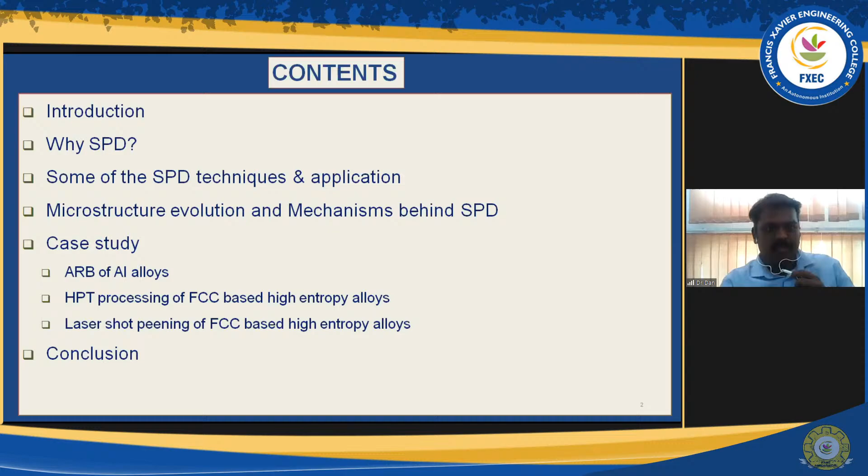Okay, so I will start with what's plastic deformation. Maybe all of you know about it, right? Plastic deformation means it's a permanent distortion. It might happen due to when you are applying external load to your material. Suppose, for example, here I took the tensile test.

Now I will talk a little bit about the atomistic mechanism behind this plastic deformation. To understand this process, you must know about physical metallurgy. You may know about dislocation and what is the defects in the crystals. Those things maybe you can understand. I will try to explain in a simple form.

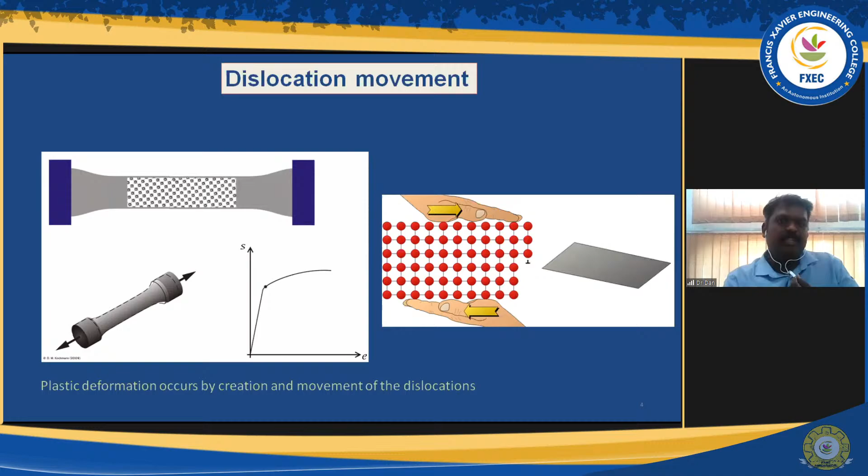Similarly, there are some other mechanisms like cross slip and climb process. By using that, deformation will happen. So this is the basic fundamental phenomena behind severe plastic deformation.

Now coming to severe plastic deformation - what is the meaning of it? Severe plastic deformation is nothing but a metal working technique. We apply very large strain on the metal or material, so that inside the material undergoes grain refinement. Suppose if you start with coarse grain, after the SPD process you will end up with ultra-fine grains or nanocrystalline structure.

Now you may ask in your mind, what's the difference with conventional processes like rolling or extrusion - they can also deform the material. So what is the difference in this SPD process? You may think about it.

The answer is: suppose if I'm doing a rolling process, with every pass the sample thickness will reduce, so the cross-sectional area reduces per pass. After a certain level you can't roll anymore - only up to a certain strain can be given to the material. But in the case of SPD, there is basically no significant change in the shape of the metal or material.

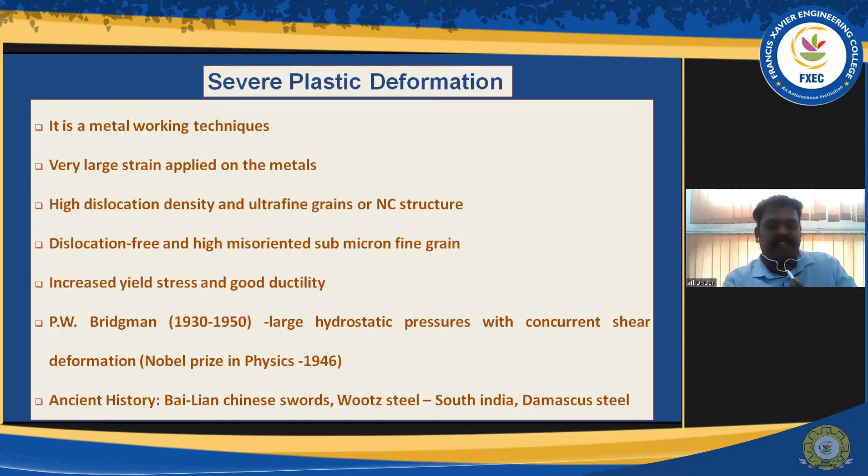So SPD is nothing but the grain refinement process. We are trying to make the material nanocrystalline, right? So there are always two approaches in the nanocrystalline approach: top down approach and bottom up approach.

In the top down approach, they refine the coarse grain into nanocrystalline. But in the case of bottom up, they do consolidation of the powder, then make it into nanocrystalline. This is the kind of powder metallurgy. I'm not going to discuss the bottom up approach today. SPD is the top down approach, and today we are going to discuss this process.

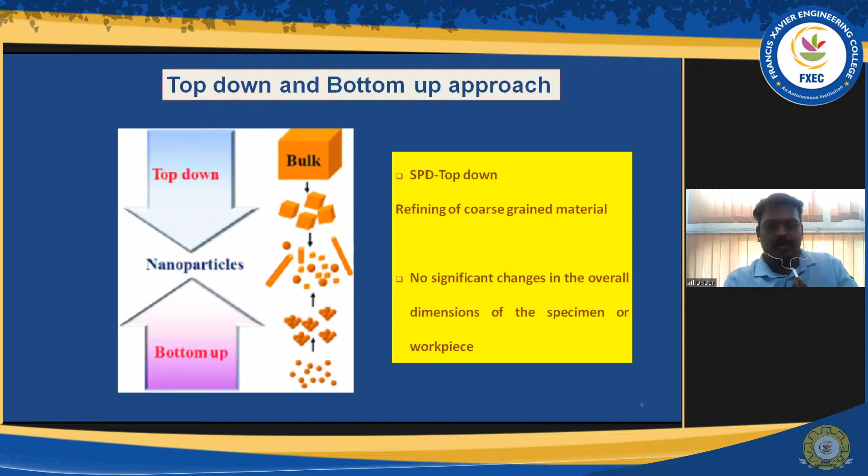Let me talk a little about grain refinement and nanocrystalline, since maybe some people don't know what is grain, what is nanocrystalline, what is ultra fine grain size. For that, I'll show this slide. Suppose you look at how grains look inside a crystalline material or metal. For example, if you take a pomegranate fruit, it's made up of many seeds - like how they are arranged inside. Similarly, different grains are arranged inside your metal.

Through the SPD process, what we are trying to do is reduce the coarse grain into the ultra fine range or nanocrystalline range. Ultra fine means if it is less than 1 micrometer to 100 nanometer, it's called ultra fine grain size. If it is below 100 nanometer, it is called nanocrystalline grain.

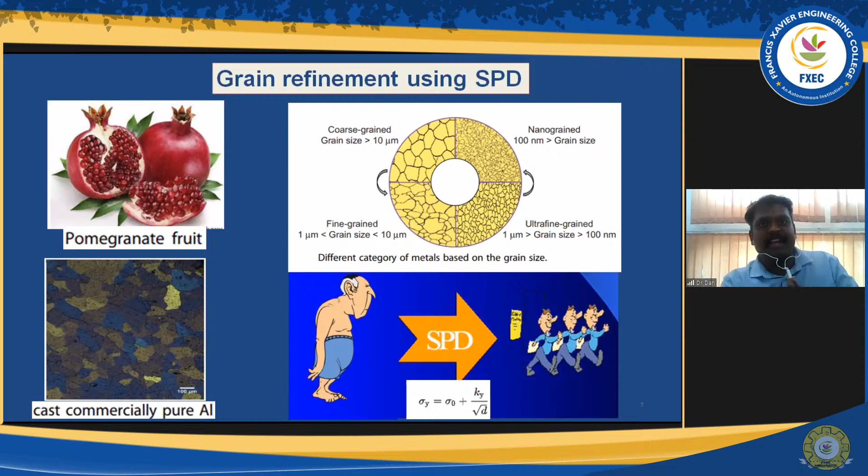So what is the fundamental phenomena behind SPD? Already I told you, grain refinement. Grain refinement leads to very smaller grain size. The typical Hall-Petch relation I showed here - usually if you reduce the grain size, that is inversely proportional to the yield strength of your material. If you reduce the grain size, the yield strength of your material will increase. That's why we are doing this process.

There are different types of SPD processes. I'm not going to tell all the processes, only some of the popular techniques I'm going to discuss today. We can divide these processes with respect to the material flow and deformation zone. With respect to axial symmetry of the material flow, you can divide it into HPT and twist extrusion. With respect to without axial symmetry, equal channel angular pressing and multi-axial forging are example processes. And with respect to deformation zone into parts, accumulative roll bonding and repetitive corrugation and straightening process are examples of these types. Now I'm coming to the most popular technique of SPD: equal channel angular pressing.

As the name suggests, the samples are equal channel - kind of square samples or circular samples. You push it into two equal channels. On the left side I showed two equal channels intersecting at one point. You can see here, I am inserting the square billet from the top. By using the plunger, we push the sample inside one portion of the channel, then it will exit at the bottom of the channel.

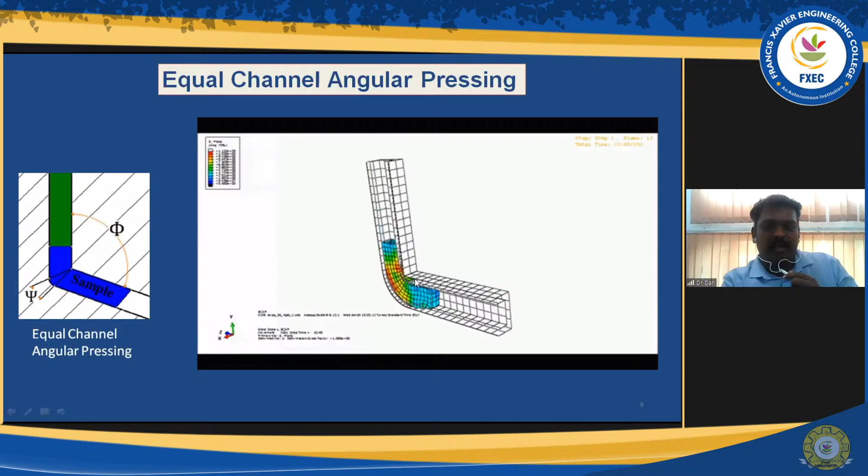So mainly what is happening is simple shear at this intersection point of the two channels. You can see a large amount of stress and strain is developed, mainly due to the shear zone. This is the intersection point of the shear zone - at that point it develops very high strain. Because of that, fragmentation of your grains happens.

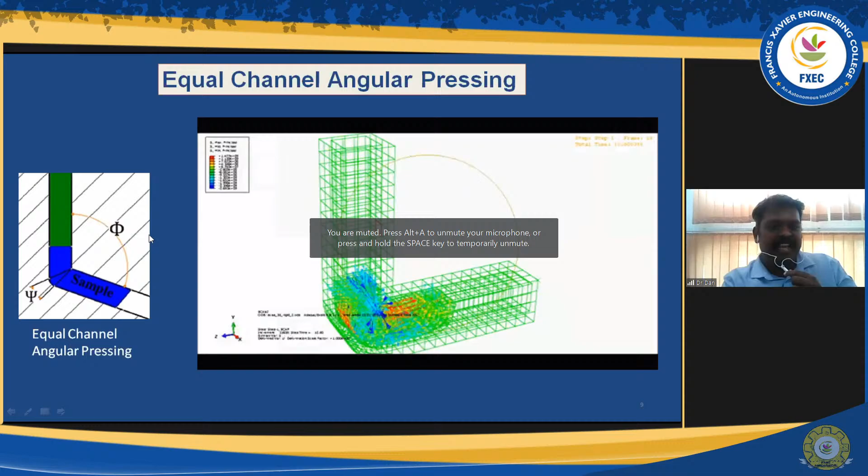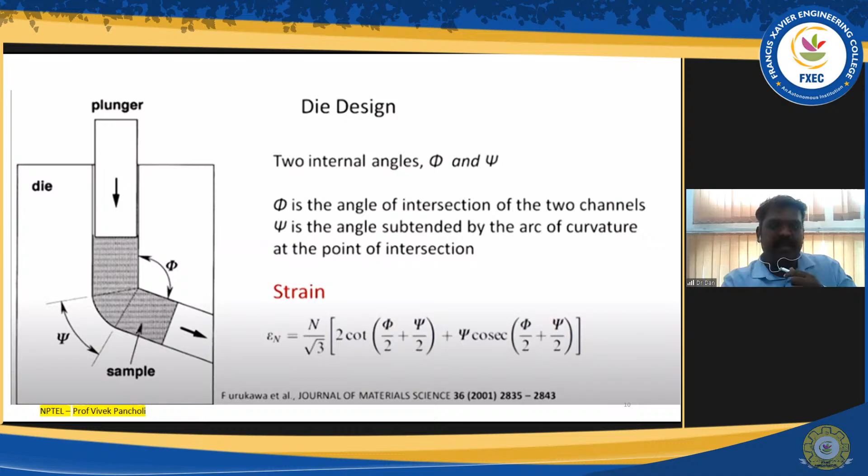Now, how do they do the experiment in the ECAP process? Mostly they do it at some elevated temperature, but they won't go up to recrystallization temperature - they always keep it below the recrystallization temperature. They will heat the sample, then try to pass it through these channels.

Based on the process of your sample, you can differentiate the parameter. Also based on the amount of load acting on the plunger, that also you can vary. So keep on, you can vary the parameter and study what kind of microstructural refinement you are getting and how it affects the property.

Those things you can study here. Suppose if you take a square sample, like in route A, what they did is they won't change the face of the sample. How they are inserting the sample, same way they will insert again and again for many passes. That is route A.

In the route B process, they will rotate the sample 90 degrees. There are two stages in the B process, alternatively rotating 90 degrees each time. In the C route, they will rotate the face 180 degrees.

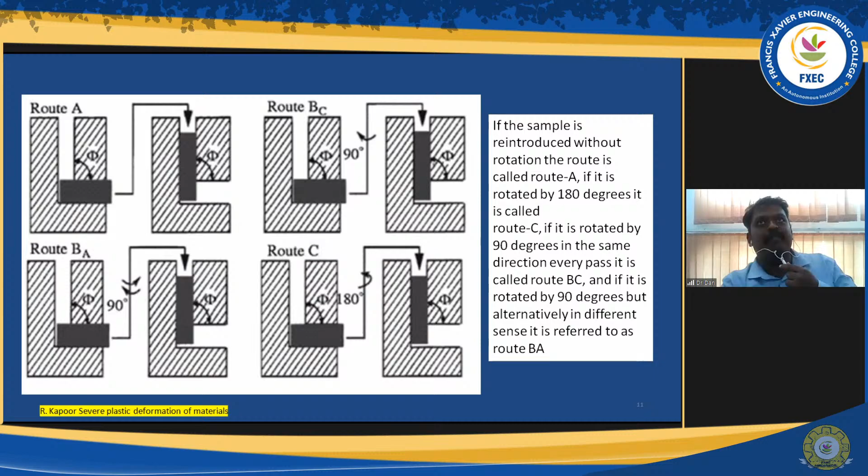Now I'm coming to the typical application of this ECAP process. Mainly if you take biomedical applications, for example knee joint replacement, also dental implants - those are mainly made up of titanium alloy. For example, titanium 6Al-4V is mainly used as an implant. Also for dental implants, cobalt alloys are used.

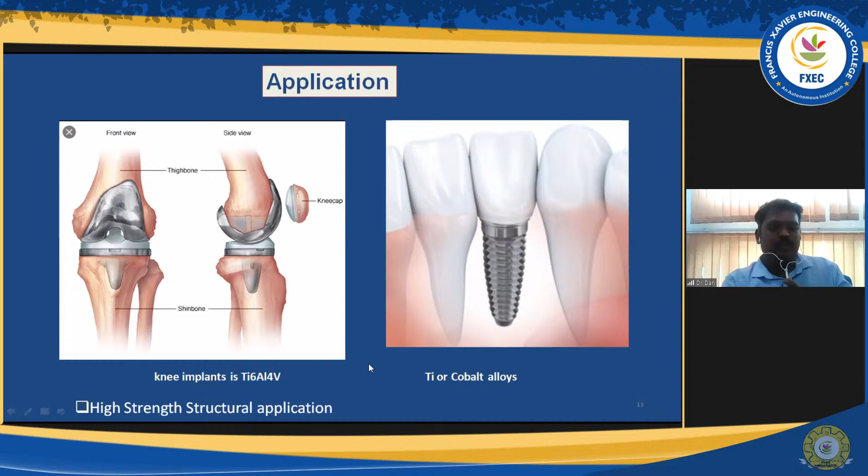Those kinds of alloys need an ultra fine grain size in order to increase higher strength, that's why we need this kind of process. Usually you can get high strength structural applications also, using the sample after processing. All the processes have certain applications, certain advantages, but also certain limitations. Suppose if you take ECAP, the problem is sometimes the shear zones are not distributed uniformly. That is the main drawback of the ECAP process.

Now I am coming to accumulative roll bonding. How they will do it, let me explain. They will do it in a conventional rolling machine. Suppose on the right side I showed the diagram. Suppose you are taking some 1 mm thickness sample, red color and blue color I showed here. Red color strip is 1 mm thickness and the blue color strip is 1 mm thickness. You are stacking that sample, then rolling them together inside your roller.

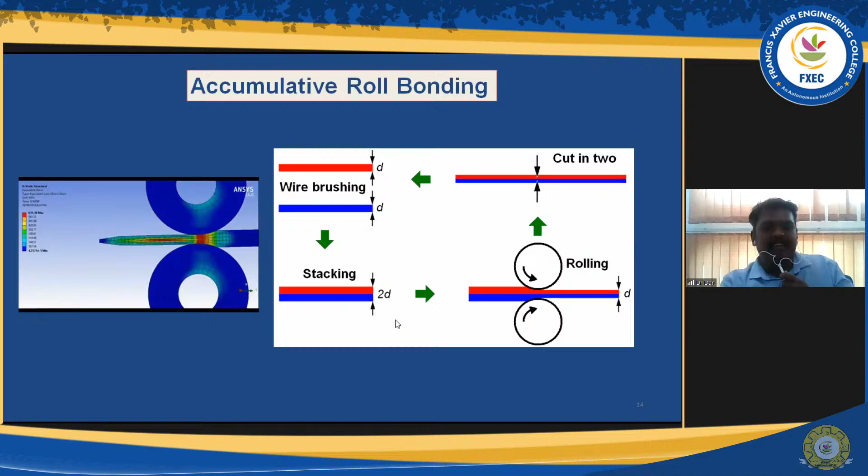Each pass I will give 50% reduction. When stacking it is 2 mm, when rolling with 50% reduction it will become 1 mm. Again I will cut this past sample into two halves, again stack it, again roll it. I keep doing the rolling process without changing the sample dimension. In that way the number of layers will increase, and you can impart very large plastic strain in your material.

Suppose for example if you do 6 cycles you will get some 64 layers. For the 64 layers, each layer thickness you can determine using this formula. If you know the initial thickness and number of passes, you can find the thickness of your sample, and also the accumulation of strain after each pass can be determined by this mathematical formulation.

What is the limitation in this method is usually for better bonding you have to do the rolling without lubrication. Usually we do conventional rolling with lubrication, but in this case you should do it without lubrication, otherwise it won't give good bonding. When you are doing it without lubrication, that may induce shear over your sample surface, which leads to detriment of your properties sometimes. So that is the limitation.

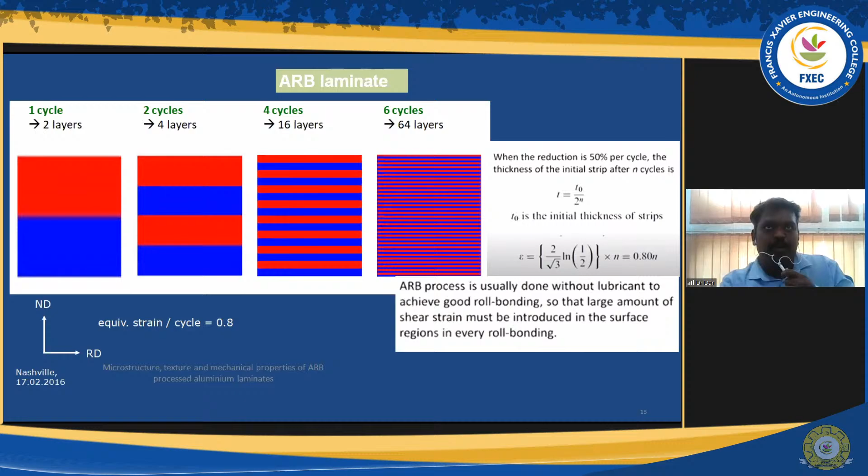So if you go for application, mainly if you see ARB, mainly aluminum alloys are processed by ARB, like in the point of view of the aeronautical industry - most impacted in the point of view of aluminum alloys.

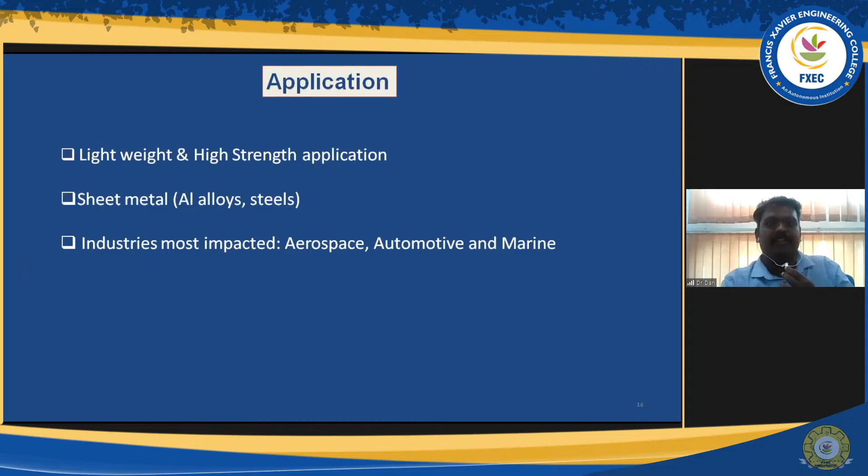So why are we going for aluminum alloys? Mainly to get lightweight, right? So lightweight, and at the same time, by using this process you can enhance the strength of the material. So it has a direct impact on the automotive and marine industries.

So now I am coming to high pressure torsion, like the Bridgman method I showed, right? From that concept, they derived this HPT process. This is the first SPD process they proposed.

In this process, what they will do is place a disc sample in between two anvils. The upper anvil will apply higher pressure. In this method you can apply pressure, and in the bottom anvil they will rotate. Because of this rotation you will get shear in the sample, like rotation plus pressure.

Because of that, you get more strain compared to other methods. You get very high strain in the material, but the limitation of this process is that the sample size is very small, only 5 mm to 10 mm. So only very small sample applications can use it. The strain mainly depends on the number of turns of the anvil, also on the thickness and radius of your sample.

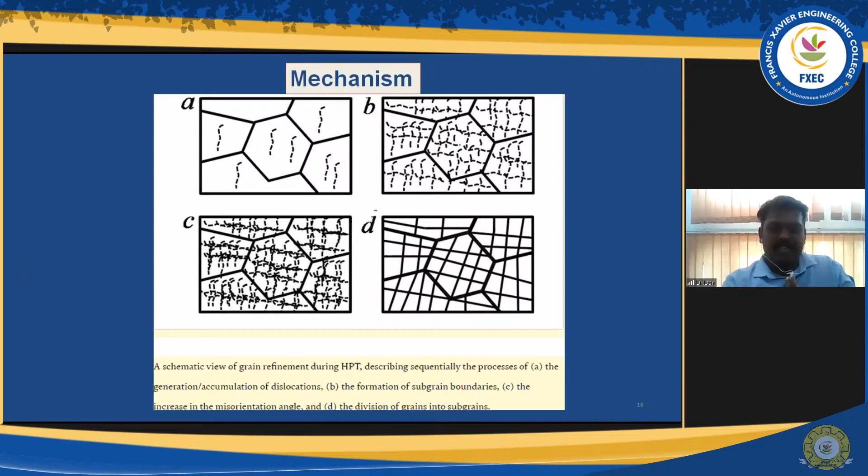Also, the angle of each cell orientation will become highly misoriented, so finally it becomes a kind of subgrain. Subgrain means you've reduced to a very small grain size. A similar process happens in other processing methods too, which induce some kind of deformation zone and increase the dislocation density. Because of that, you finally get a submicron grain size in the material.

So that's what I want to say here. For example, in terms of application, people mostly tried magnesium. Magnesium is used for biomedical applications and also corrosion applications. You can increase the mechanical properties of magnesium alloy by refining the grains, and also get an isotropic, homogeneous texture.

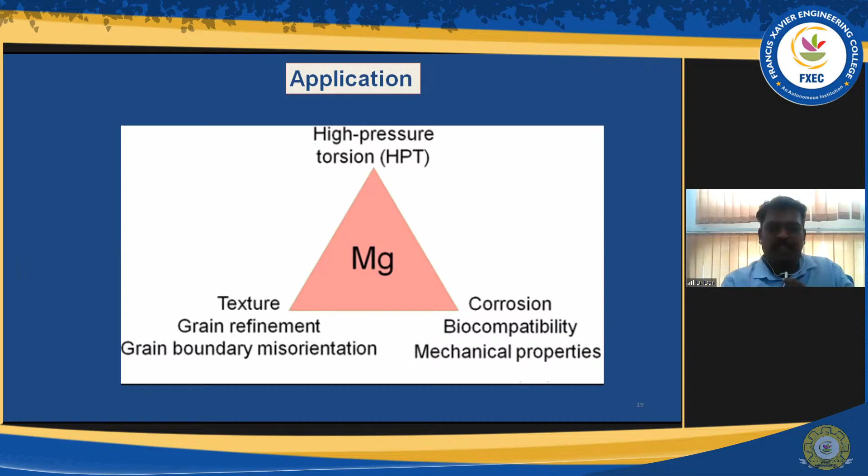Texture means I will explain that in a later stage, a little bit. So you get homogeneous texture and grain refinement, which leads to very good biocompatibility and corrosion resistance in this magnesium alloy. So people tried some of these processes.

Another process is multi-axial forging, which is mainly derived from the normal forging process. Here, clearly you can see three directions, X, Y, Z. I'm changing the strain path for each process. For example, in the diagram on the left, the top side is black, one face is green, and one face is red.

Initially on the black side you deform the material in the X direction. Later you come to the red side, which is the Y direction, and deform there. At the third case, the Z direction means the green color face, which you deform. You have to continue this cycle for so many cycles, and by using that you can achieve grain refinement.

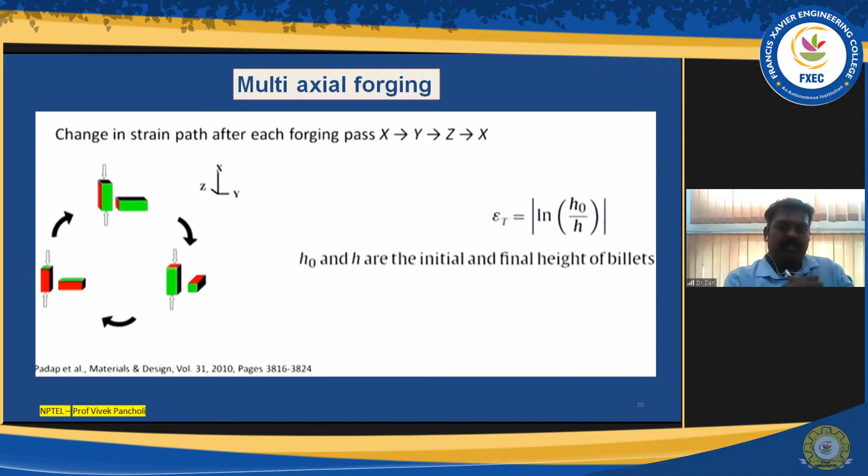Like grain refinement, it's mainly based on the sample height, initial height, and final height of the process. Most aluminum alloys and titanium alloys are also tried in multi-axial forging. In industries, they mostly use these processes to break down the cast texture using this kind of multi-axial forging process.

So the next process is repeated corrugation and straightening. This is a newer technique, studied maybe in the 90s. It's very simple actually. If you look at this, it's mainly based on the die design.

In the top diagram you can see a V-shaped die. When you press it, it will bend the sample on the top side. On the bottom side is the straight tool, which will straighten your sample. After straightening, you move the sample a little and apply bending to the next area, then again it comes for straightening. It's like you are repeatedly doing the corrugation and straightening.

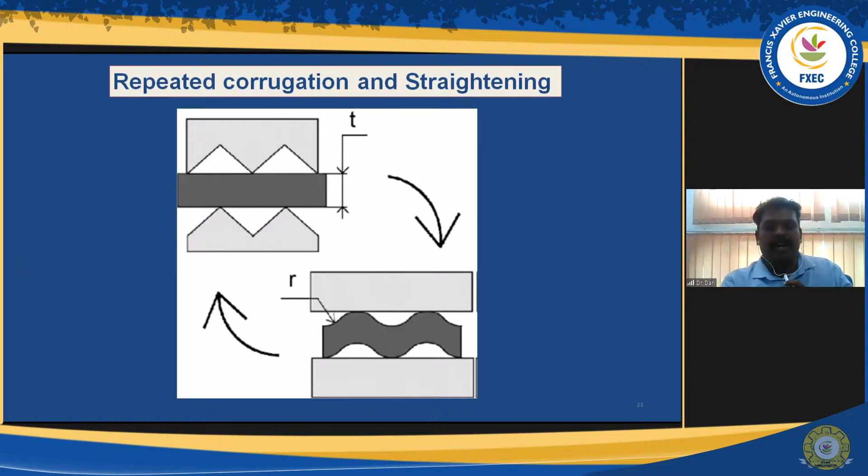That's why this process is called repeated corrugation and straightening. This also leads to significant grain refinement and a very high amount of deformation zone, and shear bands will form in the material.

Next I'm coming to the surface modification technique, which is friction stir processing. This is also one of the grain refinement processes. Most recent researchers are working on this friction stir processing because it's very simple to use, like friction stir welding - you just have to exchange the tool, and if you exchange the tool, you can make the friction stir process.

By using the friction stir process, you can modify the surface. The tool is like a plunger or pin, which will go inside of your material and then rotate. If you are rotating the pin over the sample, you can expect a kind of shear stress over your sample that will lead to very significant grain refinement in the surface. By using this friction stir process, you can generate a heterogeneous microstructure.

In some research studies, what they do is import some metal particle inside your base metal. Suppose aluminum with silicon carbide particles - they put it over the sample, then by using this pin, they slide over your sample so the metal particle goes inside your base material, base metal. This will enhance the surface property of your material.

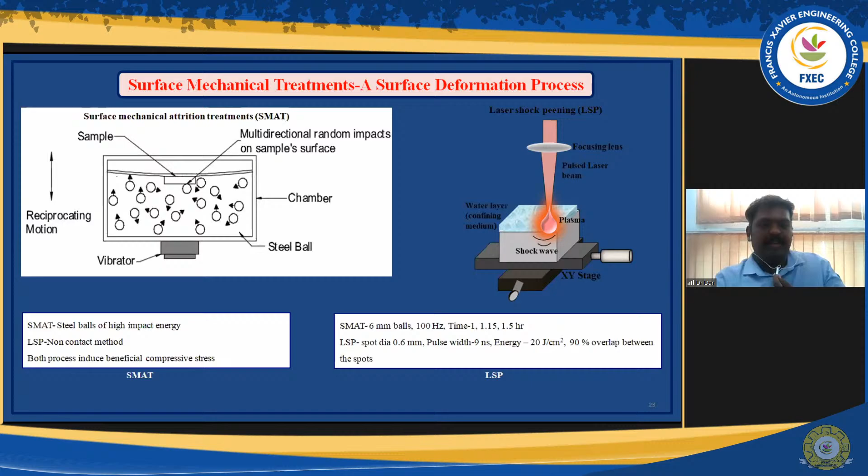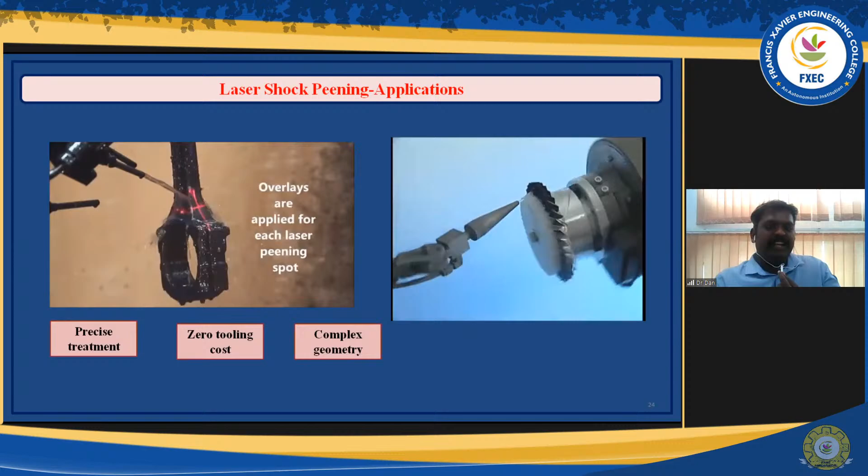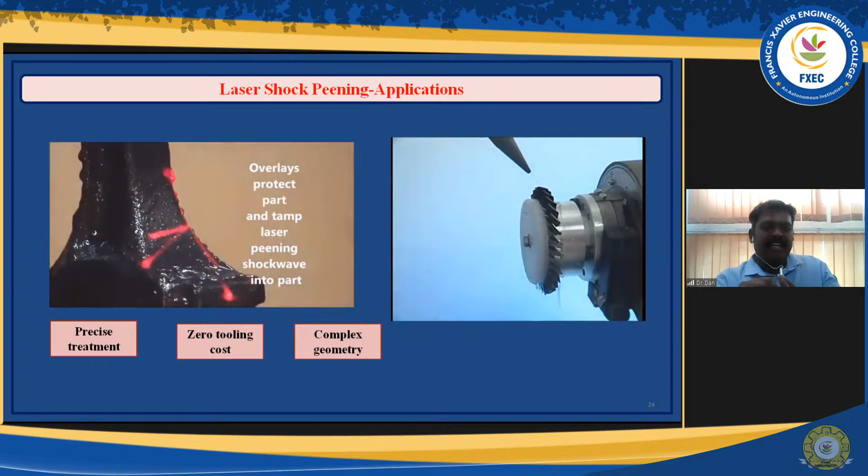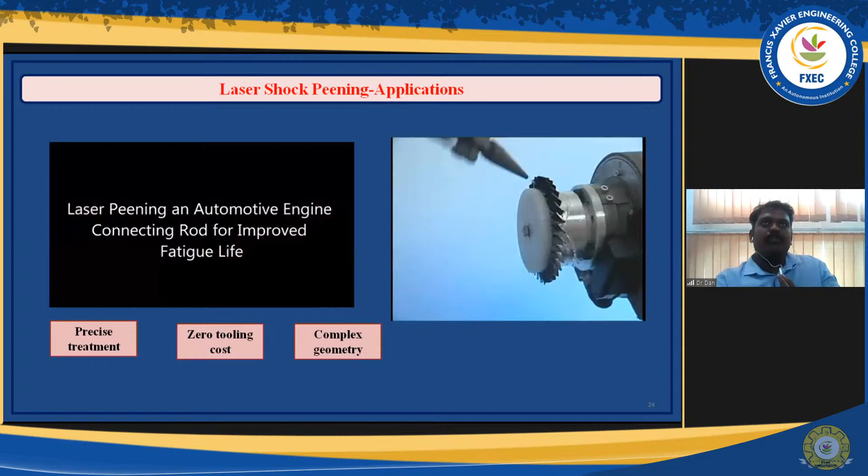So here I showed some applications of laser shock peening. You all know about the connecting rod, as mechanical engineering students. In order to improve the fatigue life, they are trying to do the peening over the connecting rod. The advantage of this method is that you can precisely control your laser spot, and there is zero tooling cost. In the SMAT process, if the part has curvature or complex geometry, I can't cover it properly. But with laser peening, I can cover even complex geometry.

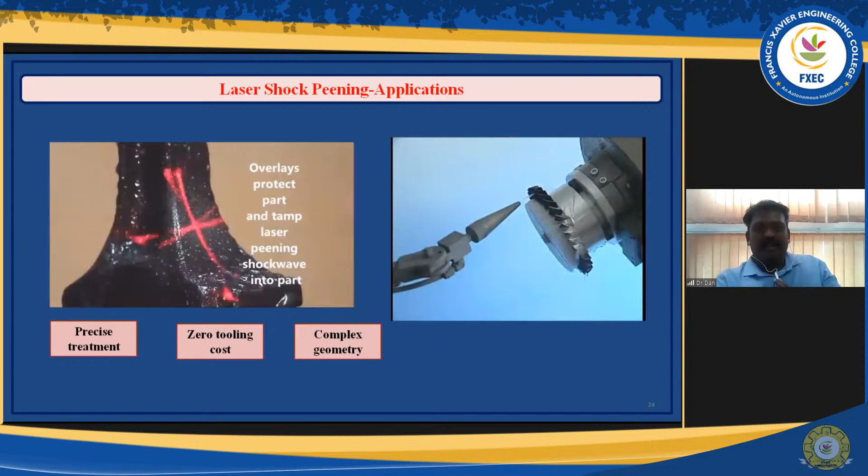On the right side I showed how they do it on a gear, you can see. So these are some examples of surface modification techniques.

Now I am coming to the case study. I will try to show how to present the results. For those doing research, or faculty starting to think about research problems, this may be useful, how to present the data so they can understand. Most of the work I'm going to present here is mainly from my postdoctoral professor's work, some of my PhD work, and some of my work at IIT Indore. I will try to explain.

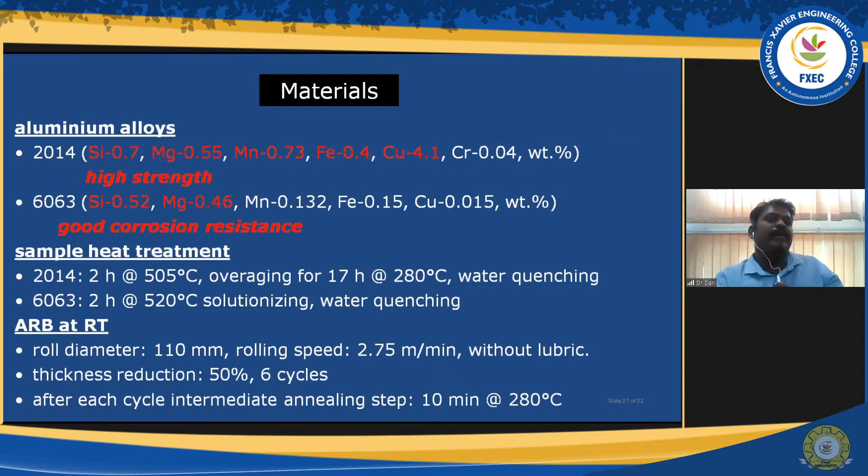First I will explain how they did ARB on aluminum laminates. Mostly the ARB process was done for aluminum alloys in order to improve the properties of the aluminum alloys.

Suppose these are two grades of aluminum, 2014 and 6063. These are two dissimilar aluminum alloys, with small amounts of silicon, magnesium, and manganese. 2014 is a little harder than 6063. So they started with these two different materials.

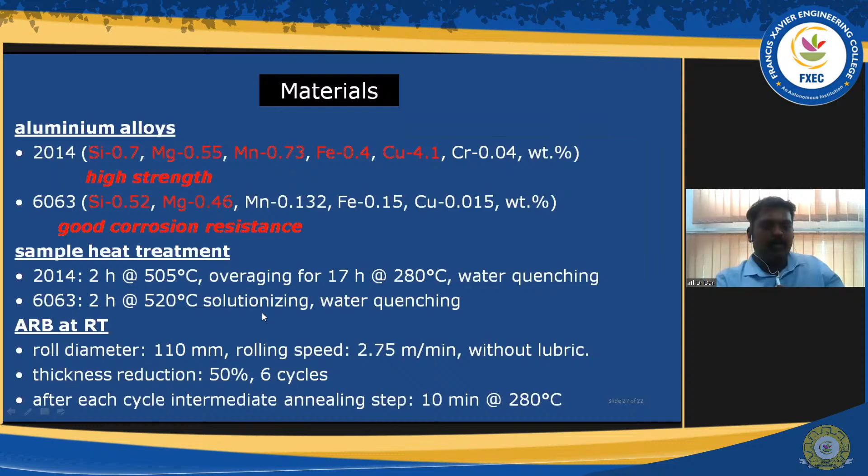They did three experiments. In the initial stage, they took the 6063 strip and stacked it only with 6063. Then 2014 stacked only with 2014. And in the third case, they stacked 6063 with 2014.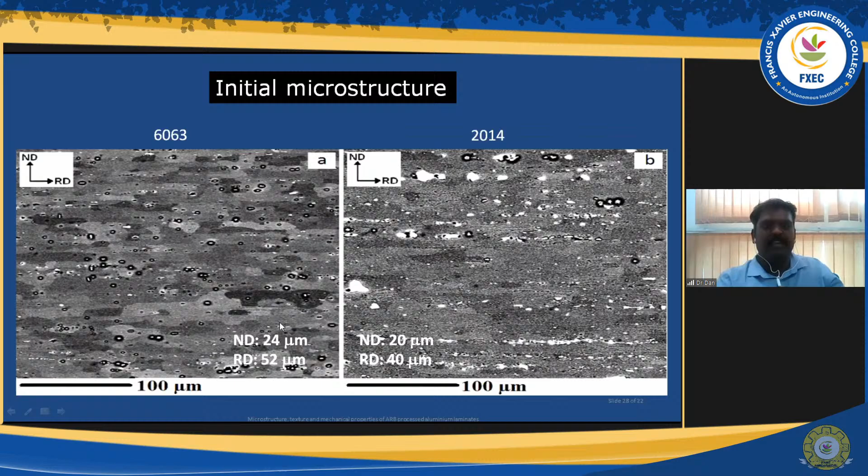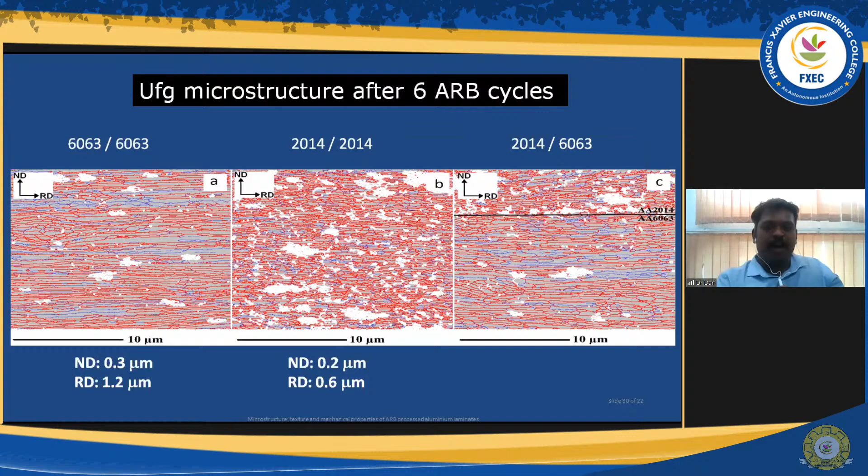From a microstructural point of view, it generates very high refinement after 6 ARB cycles. In the ND direction, it's in the range of 0.3 micrometers. For 2014, it's in the range of 0.2 micrometers. And in another case, it's in the range of 300 nanometer grain size. So very significant grain refinement was achieved.

Now I am introducing the term texture. You may not know the background of what texture means. Texture is nothing but the grain orientation, one of the parameters of the microstructure. If you take a grain, it may sit in a different crystallographic plane or crystallographic direction, so you need to define the crystal orientation accordingly. Here I showed the global texture, meaning the overall texture of your material, since any metal has millions and millions of grains.

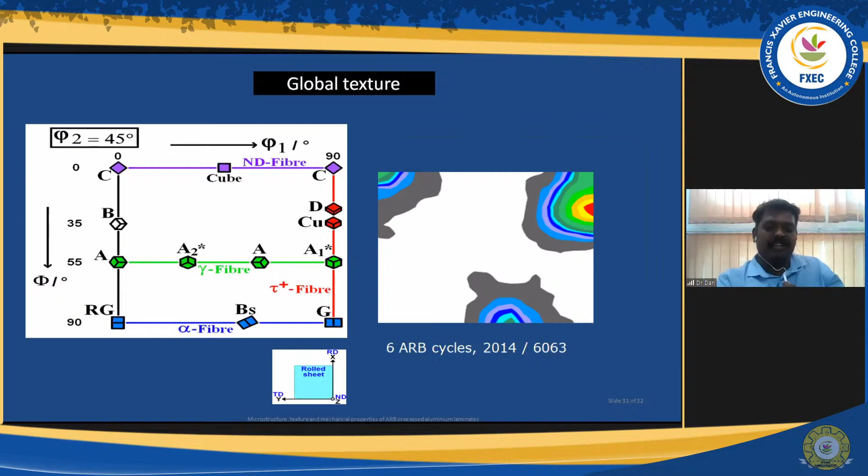Each metal will be arranged in a different manner. So based on your processing, that will try to align in a particular orientation, which leads to a characteristic texture in the metal. That's what they showed here: some kind of orientation distribution function, how they represent the texture. To understand that, let me give a little background.

Suppose your crystal has many grains, each with some orientation, represented as a point lying in a cube, as shown at the bottom of the diagram. Your orientations lie together in this 3D Euler space. If you cut these cubes, you get a 2D slice. Suppose from top to bottom I'm cutting with respect to a 5-degree angle, then I get these slices. Each slice shows how these orientations are located, and those things you can represent by ODF.

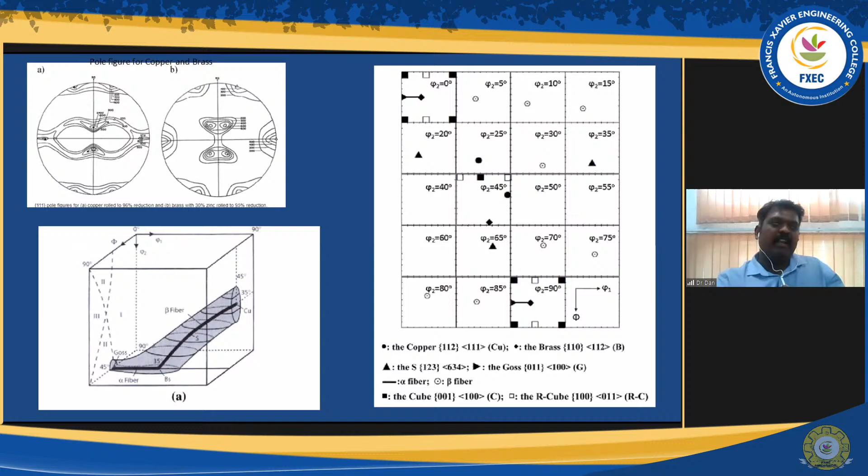On top I showed the pole figure, which is another technique to represent the texture. With respect to poles, they show your crystal orientation.

Now in this particular case, what happened is that some particular orientation is developing after 6 ARB cycles. If you see the 6063 D component, this is called the Dillamore component, which usually forms during the rolling process of aluminum alloys. The same thing is happening in the ARB. The Dillamore component is getting increased in all the alloys, irrespective of the alloy, and in these three different cases the Dillamore component is increasing.

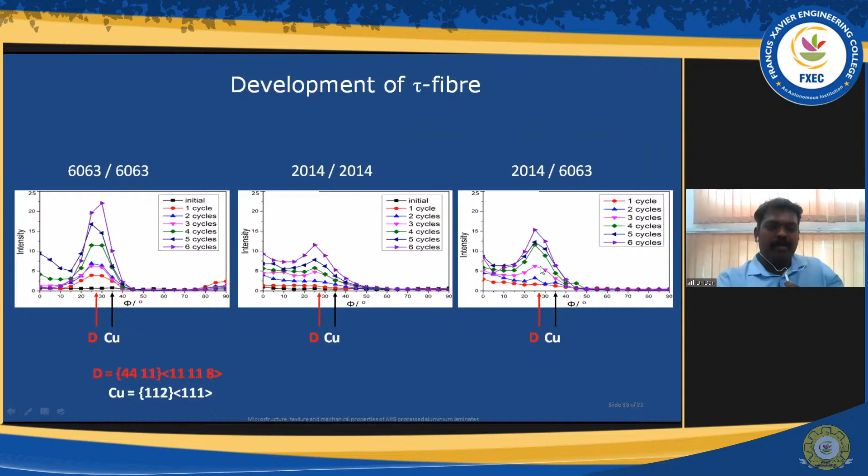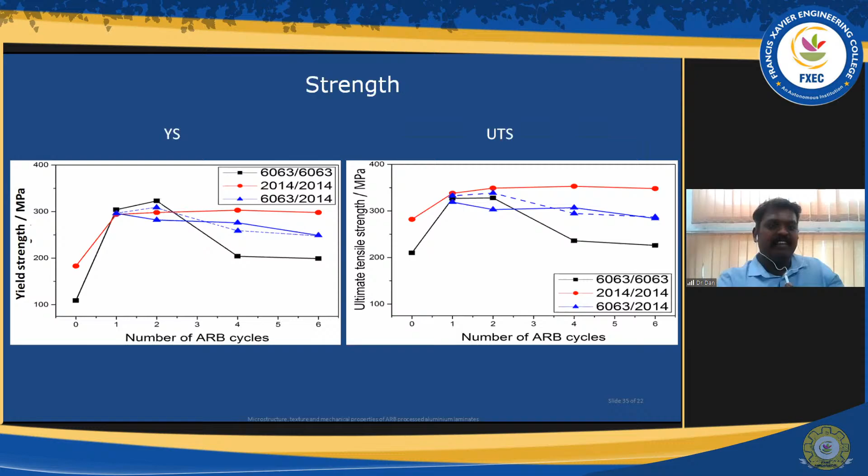At the end, what we need is to get a high strength material. You can see here, for the different processes, how they got the yield strength and ultimate strength. Significantly, it increased from 100 to 300, as you can see here.

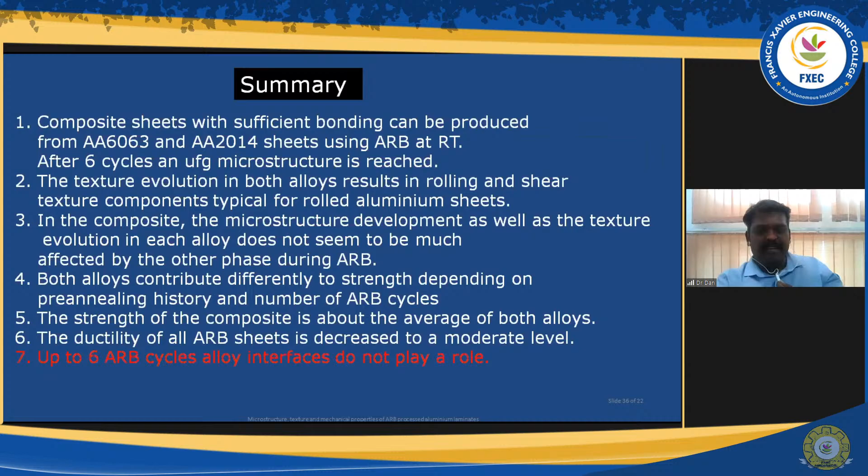So, from the summary of this work, I can say that I can easily bond these different kinds of aluminum alloys. Also, at room temperature, I can go up to 6 cycles in ARB, which leads to ultra-fine grain size and develops a characteristic texture, as you also saw in the previous slides.

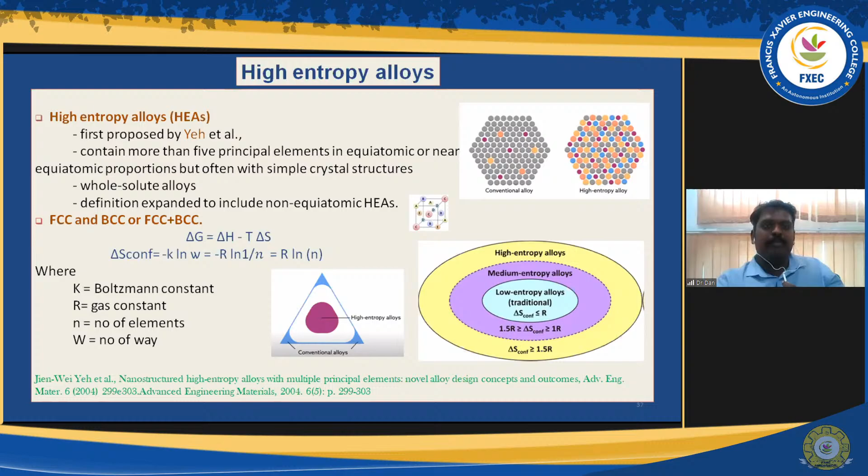Now I'm coming to a little bit about my own work, what I did during my PhD and postdoctoral work. This is a kind of new alloy called high entropy alloys, which is a multi-component alloy. If you take a conventional alloy, like the aluminum alloy shown earlier, aluminum is the main base and remaining elements are added to enhance the property. But in high entropy alloys, there is no base element; all elements act as principal elements. As per definition, it may consist of 5 or more elements that form very simple structures. Because of that simple structure, you can easily control the property of the material. That's why I selected this alloy.

If you see the property of the alloy, some of the few HEA systems I showed here have really very good properties compared to conventional alloys. Fracture toughness is also very high compared to conventional alloys, mainly coming from the core effects of these alloys. These are some of the core effects, but I won't go into detail.

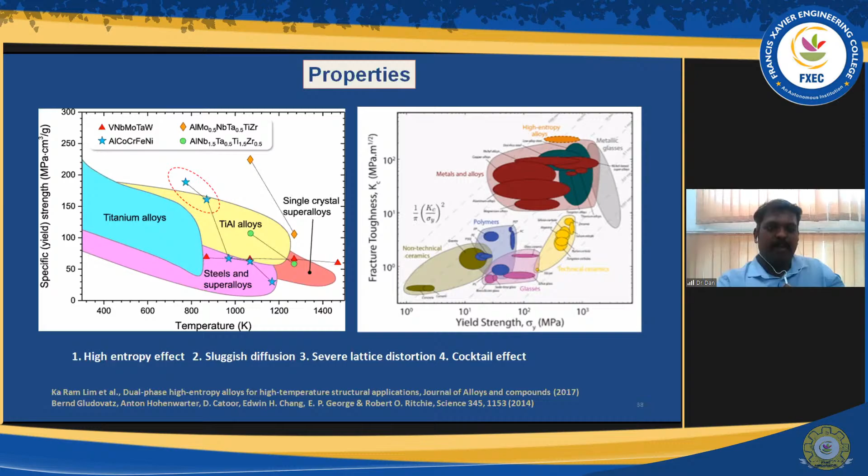So I'll tell you what I did. In my PhD, I studied simple thermomechanical processing of this alloy. I took a fine grain size material, around 7 micrometers, with very random texture, and tried to roll the material to heavy deformation. Because of the rolling, the deformation led to significant grain refinement, and at the end of the process, with 90% reduction, I got grain size in the range of 200 nanometers.

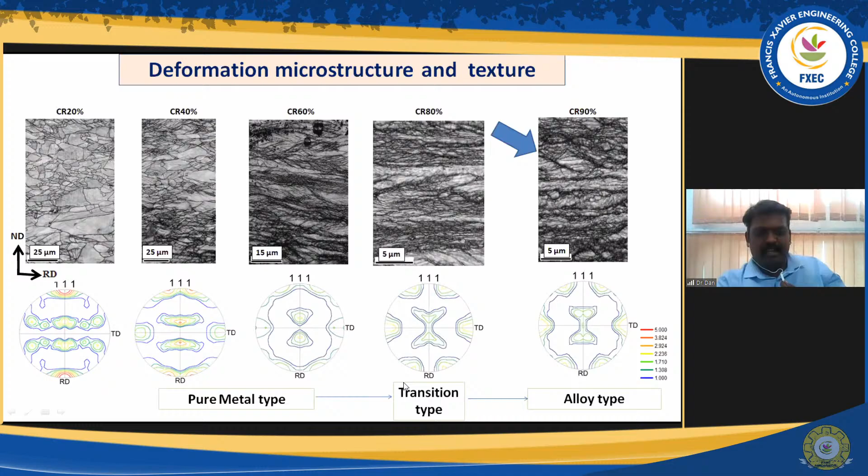So I showed each deformation level, how the microstructure evolves and how the texture evolves. I showed those things here, but this is not the important part.

What I did is after heavy deformation, I tried to anneal the sample. In this material, I could roll until 0.12 mm, a very small sheet. After that, I couldn't roll further because of the limitation of the rolling process, as I already told you.

So after heavy deformation, I tried to anneal the material in order to get the ultra fine grain size. I got full recrystallization after high temperature annealing at 700 degrees Celsius, and got something around 1 micrometer grain size. Also, this material is giving very slow grain growth in this alloy.

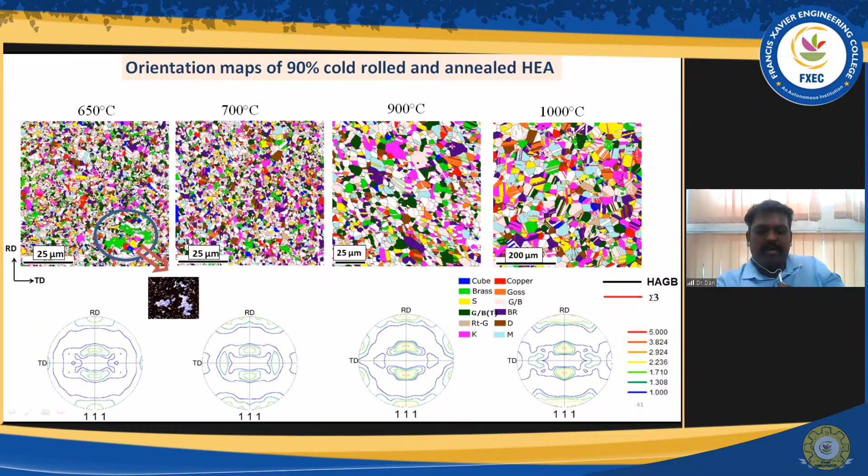Here I try to show some of the grain boundary characteristics. In the sample, you can see the red color lines. What I showed here is mainly due to twinning - during recrystallization, many annealing twins are happening in this alloy, which also leads to the very small grain size.

In case of 700 degrees Celsius I got 800 nanometer including twins. What I mean by twins here is sigma 3 boundaries. In the misorientation angle diagram on the right side, you can see at 60-degree misorientation angle a peak, which indicates that your sample has a large number of CSL boundaries - CSL are sigma 3 boundaries.

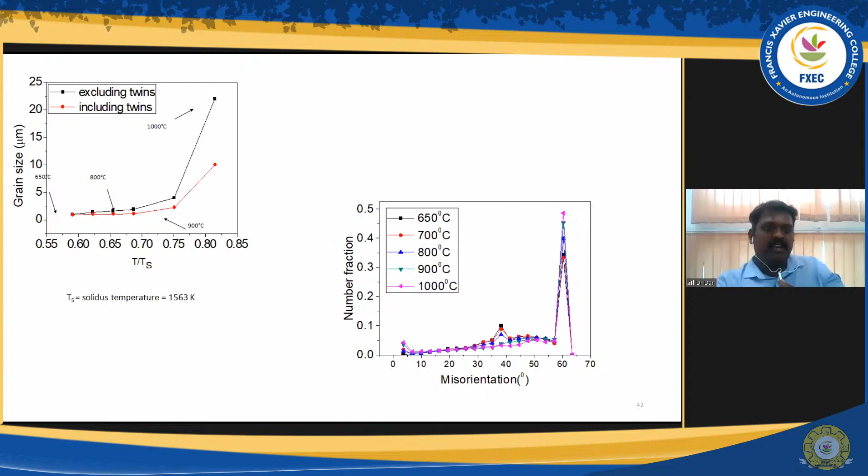Now I will try to do some tensile tests - the ultra fine grain size is giving very good ultra high strength, like 1500 megapascal, with appreciable ductility. With increasing grain size, I got increase in ductility at the expense of strength.

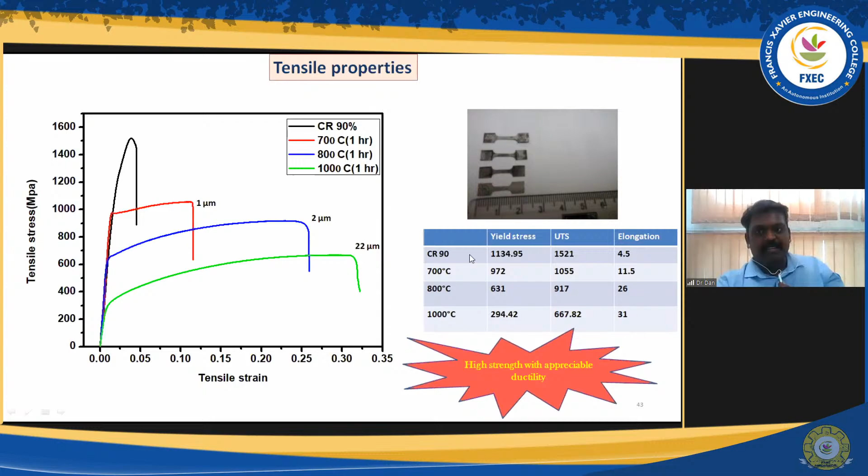So in this study, I got the ultra fine grain size by grain refinement. Also the grain growth is very slow in this material, and the texture evolution is very weak - brass type texture, very weak texture in this alloy. That's what I want to say about my work.

Now I'm coming to my postdoctoral supervisor's work. They did a similar material and performed HPT on it. Maybe I forgot to tell the composition - this is made up of cobalt, chromium, iron, manganese, nickel. This alloy was found by Cantor, so mostly it is called the Cantor alloy. If you search for Cantor alloy, you will get this information.

It has a kind of FCC based crystal structure mainly. So I will try to explain what they tried to do - they tried to refine this material from the as-cast structure. In the as-cast condition, you can see very huge, very high grain size.

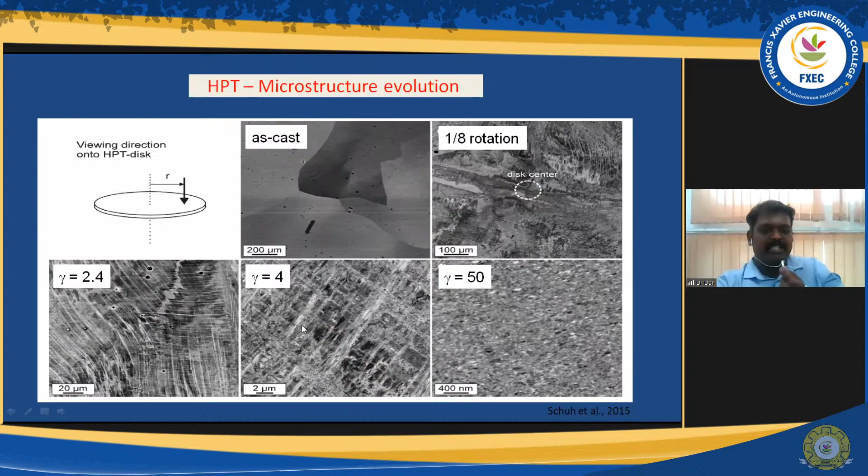After refinement, clearly you can see the number of turns. I told you that with respect to increasing the number of turns, your refinement will increase. With increasing refinement, you can see the deformation bands, and finally you can see the subgrain structure.

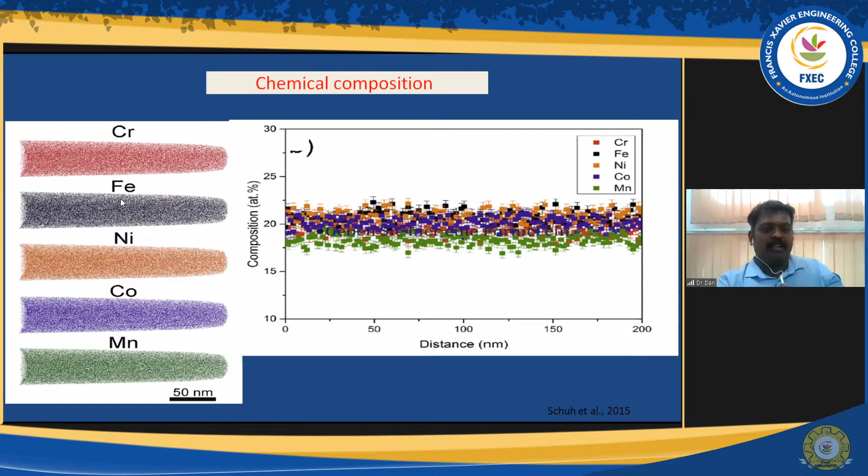In this study, they tried to see the chemical composition at the atomic level. So after deformation, these 5 components are still distributed homogeneously - that's what I wanted to say here.

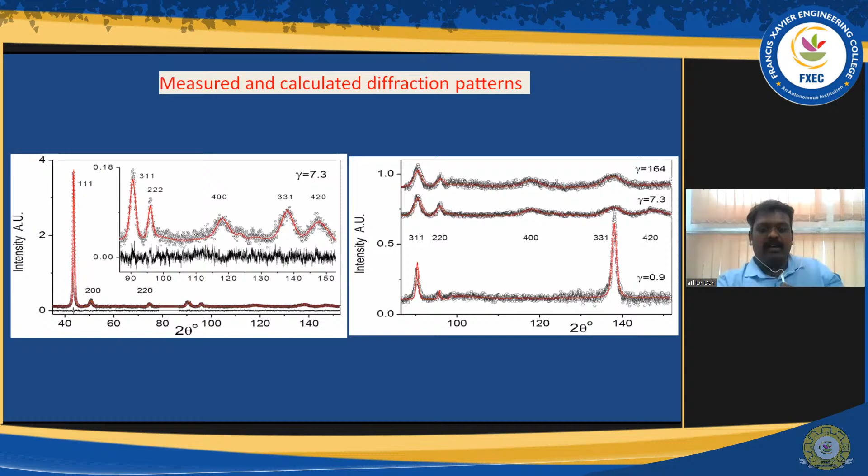Then they tried to study by the line profile method, measuring the dislocation density of the material after the HPT process. They also tried to calculate the grain size from this calculation, and they got around 25 nanometer after 5 rotations - you can see how much they refined the material.

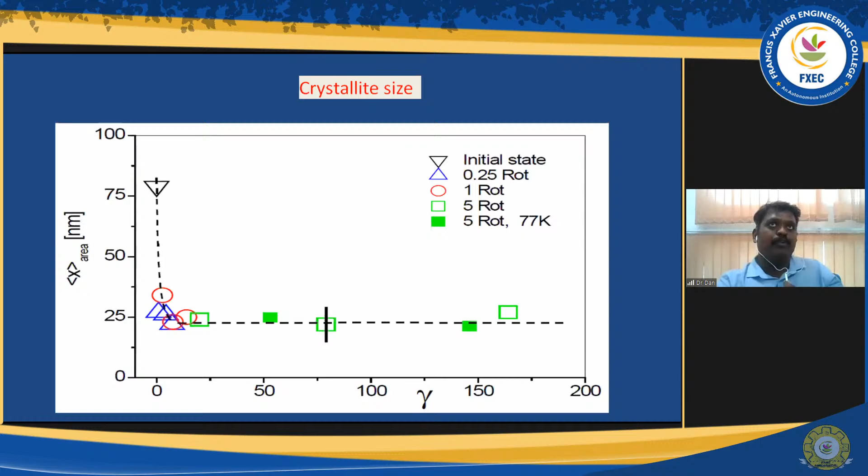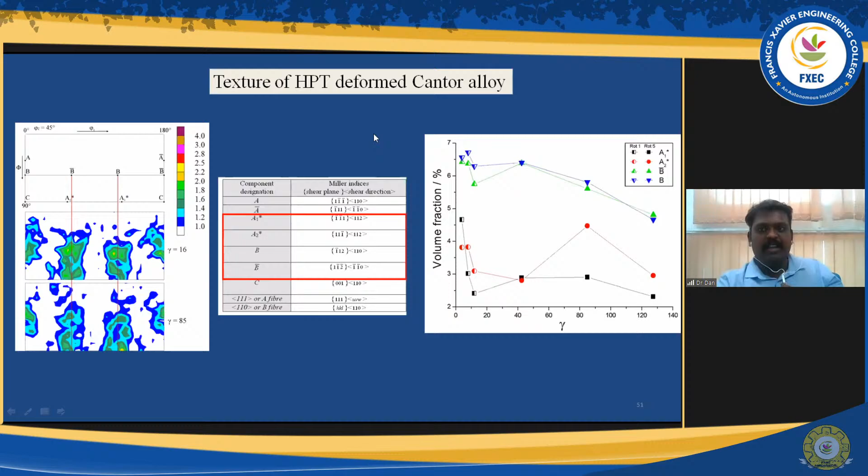If you go for texture, again as I already told, any process will lead to characteristic texture evolution. Here mainly we are doing the shear process, so shear related texture components will evolve. If you take B bar and A star, these are all shear related components. As expected, these shear related components are increasing in this alloy, but the texture is not strong - it's really very weak.

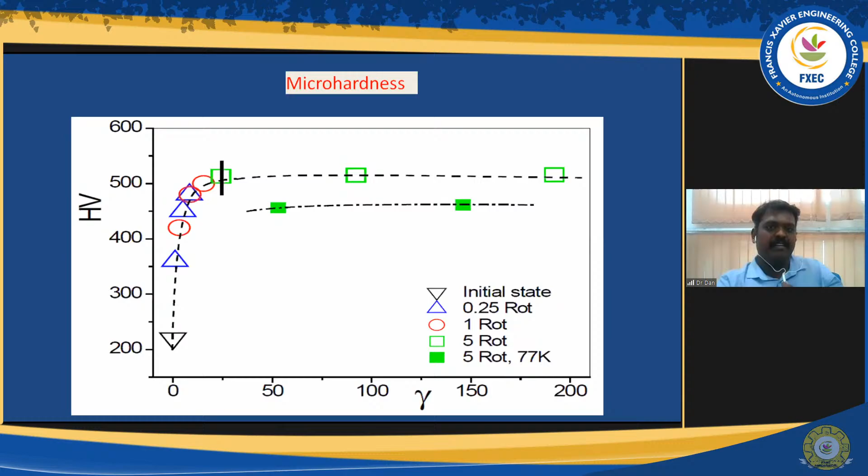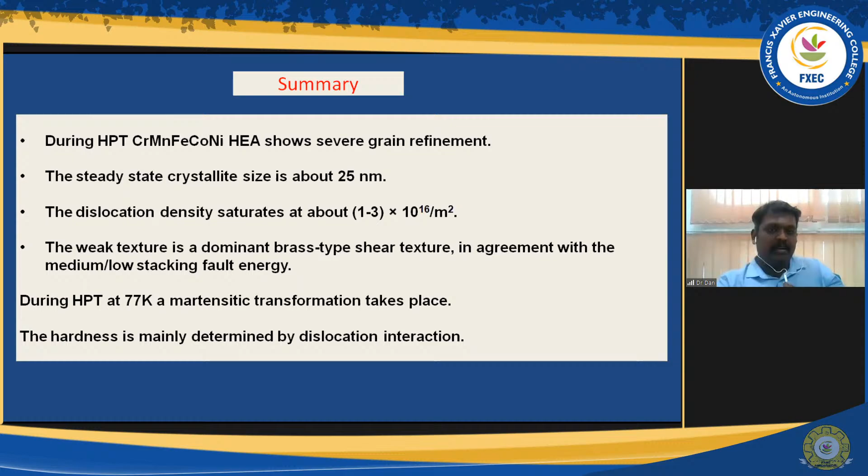That's what I wanted to say here. Also, we tried to measure the hardness of the sample. The hardness of the sample after 5 rotations significantly increased, you can see here. So what summary can I say from this HPT process? They could refine until 25 nanometers, they got very high dislocation density, and they understood that it has a weak brass type texture after heavy severe plastic deformation. That's what I wanted to emphasize.

Now I am coming to the important point of study. What I did here in IIT Indore is mainly a kind of surface modification technique. I am working with Professor Dr. I. A. Palani in the mechatronics lab, doing some experiments with their help.

So why do we have to go for laser shock peening? In order to improve the effective life of the material, we do this laser shock peening process, which induces residual compressive stress, which in turn gives better fatigue life to the sample. I will try to do this on the same sample, the same cantor alloy.

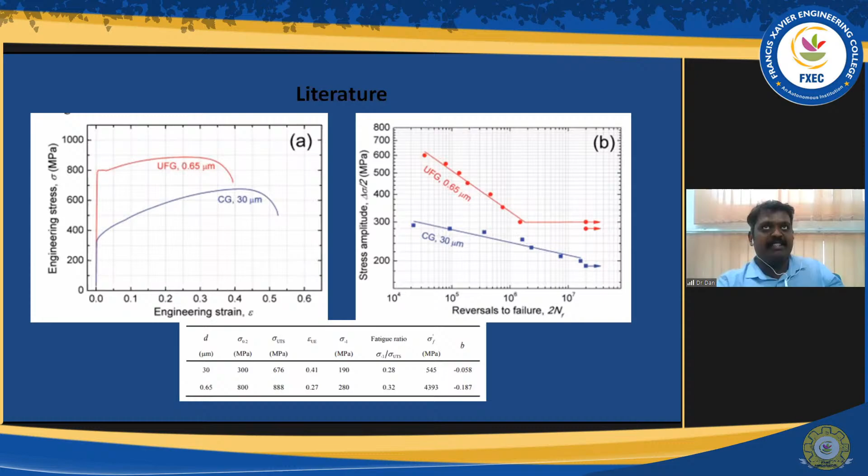Already people have studied the ultra fine grain size and the fatigue strength of the material, so they got a very good fatigue ratio. For the ultra fine grain, they got 0.32 fatigue ratio for this material. So I wanted to see how this laser shock peening will enhance it, or how it comes out after processing.

That's what I want to see. It's in my initial stage, so I will show some of the results.

Maybe you have some doubt about what is the meaning of peening. Peening means nothing but the backside of the hammer is called the peen. So you are doing plastic deformation using the peen - that's why it's called peening.

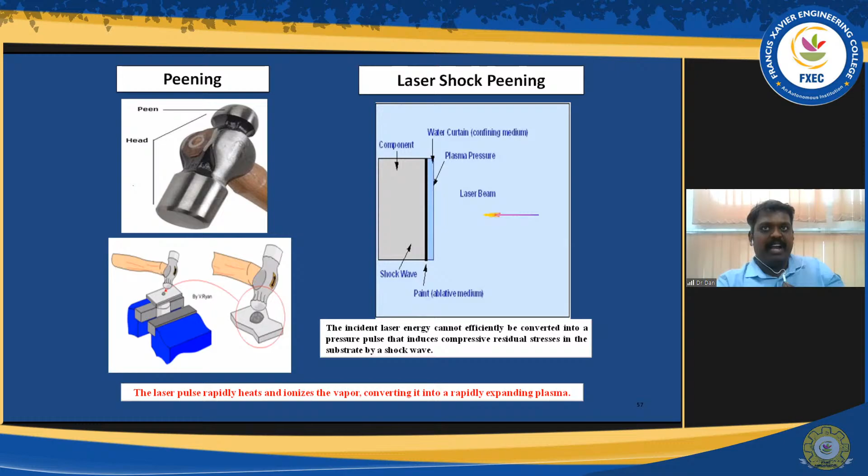In laser shock peening, the process is shown on the right side - a very high laser pulse generates plasma, high energy plasma that induces a shock wave, and that shock wave refines your material. Compared to the conventional SMAT process, laser shock peening has a little advantage - you can peen your material even beyond 1mm depth, but in mechanical peening it is really less. That's what I wanted to say here.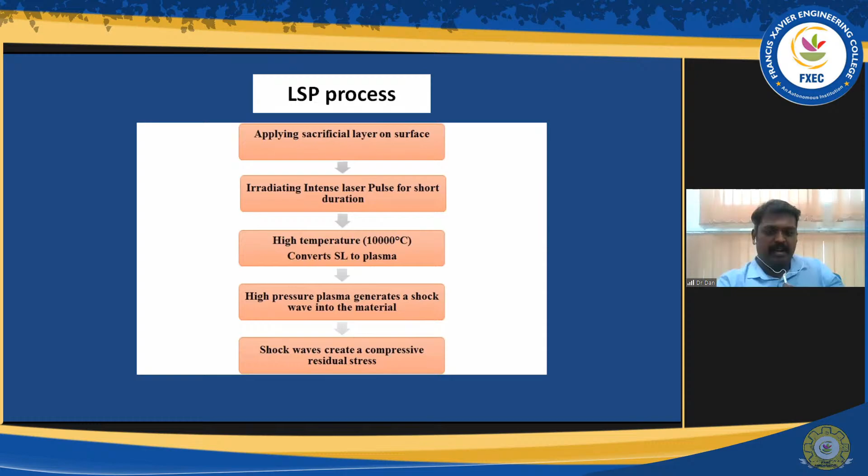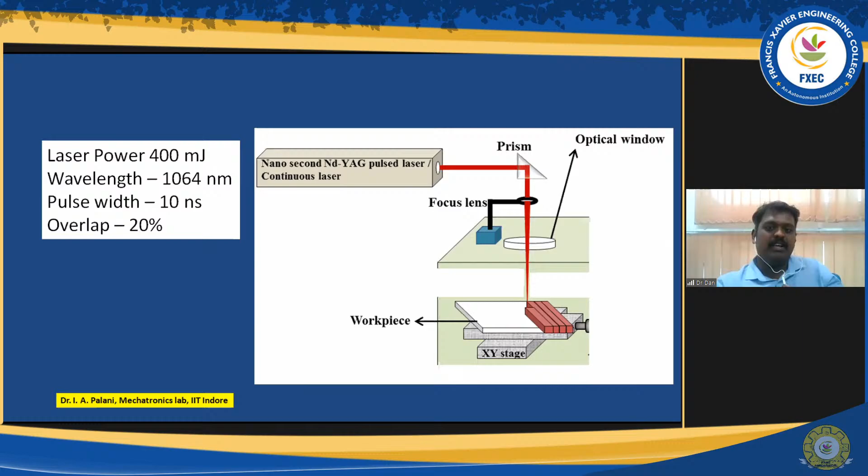Now, how does the LSP process happen? Same as I already told the procedure - this is the setup we have in our lab. We place the sample, and the Nd:YAG pulse laser generates the laser pulse. We move the workpiece with respect to the spot of interest where we want to scan the sample, and that peens your sample.

For this study, I took two different conditions of this alloy. Maybe I will try to explain - if your background is material science, maybe you can understand. This is the starting material.

20 micrometer grain size - I took this as the starting material, then rolled it to 97 percentage, getting something around 0.3 mm. Then I annealed the sample at two different temperatures, 650 degrees and 800 degrees Celsius. Why I did two different temperatures, I will try to explain.

In this Cantor alloy, what they told is below 700 degrees, if you are heat treating the sample, it will form some chromium rich precipitate. On the left side microstructure, you can clearly see the precipitation - a little bit of sigma phase you can see here. On the right side, you can see the misorientation angle distribution. Based on that, I got the grain size in the range of 550 nanometers in this process with precipitation.

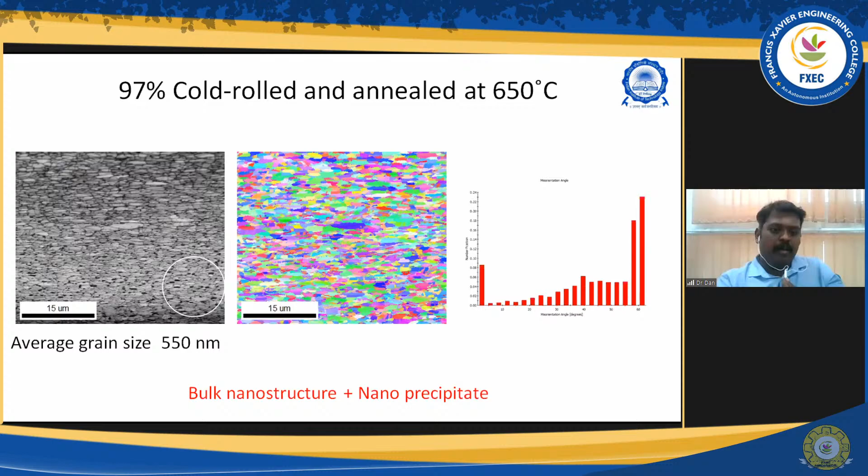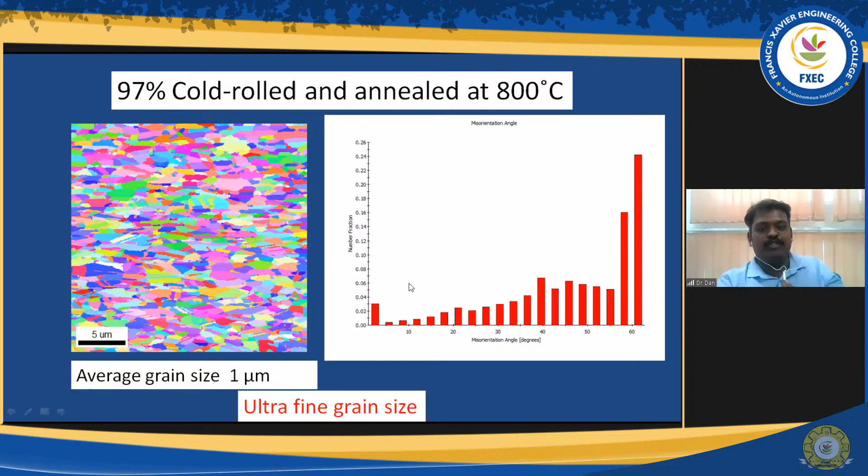Precipitation also increases the strength of the material, so that is my idea - that's why I purposefully induced the precipitation in the metal. In another case, I annealed or heat treated at 800 degrees Celsius, so there I don't have any precipitation. Also the grain size is a bit bigger, 1 micrometer grain size. I took this one also as ultra fine grain size - so two different grain sizes I took. Then I did the peening.

Peening normally you can put directly over the sample, or you can place the sample inside the water. If you place it inside the water, the advantage is it won't affect the surface much. The high energy plasma most of the time will melt or vaporize the surface a little bit, but that won't happen when you're using water. So I did it in the water.

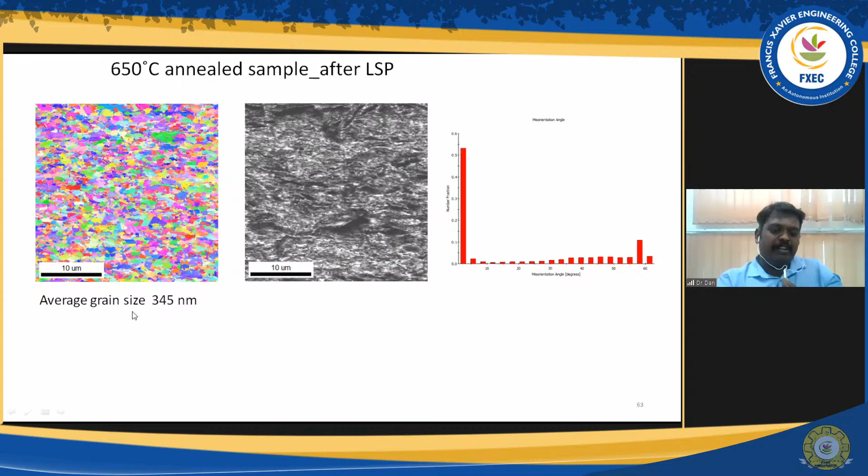So after peening, my grain is refined to something around 345 nanometers. You can clearly see it here. After the 800 sample, it's refined to something around 600 nanometers.

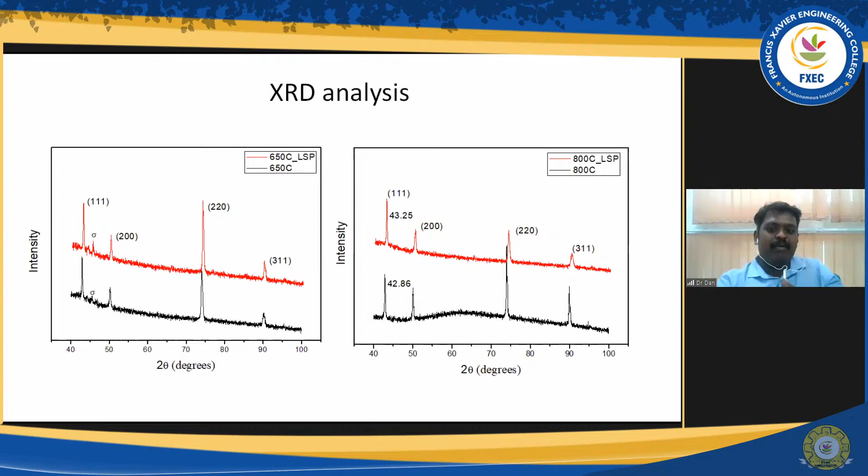It's refined. In the XRD process, you can see the precipitation, you can see the sigma phase here. Also, majority of the peaks belong to FCC. After peening, in the red color, the peaks are moved a little bit towards the right, which means your sample already has some residual stress. That's what I want to say here.

In order to measure the residual stress analysis, there are so many methods. The sine square psi method is one of the accepted methods. By using this method, you can measure the residual stress in your sample.

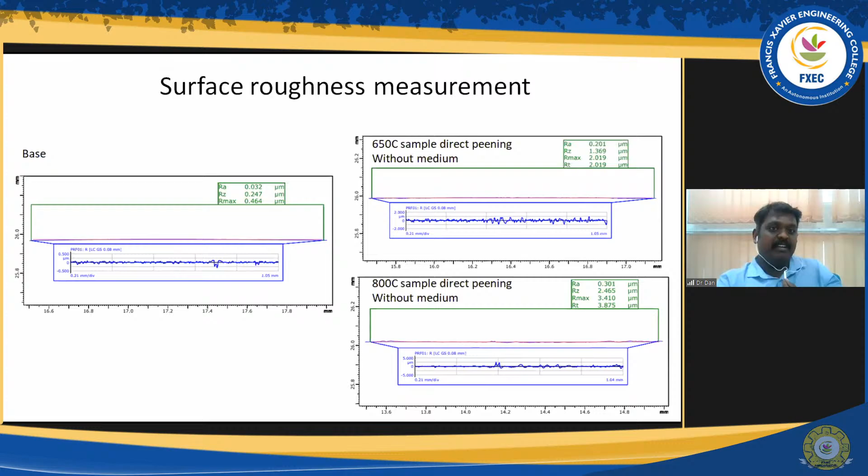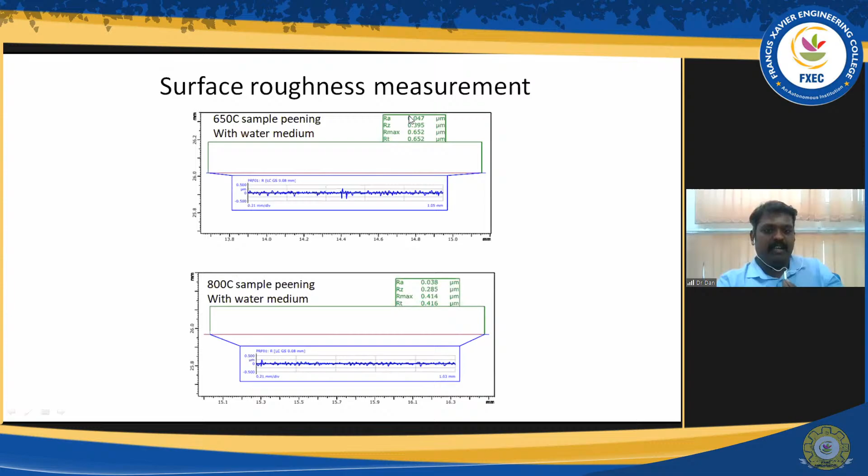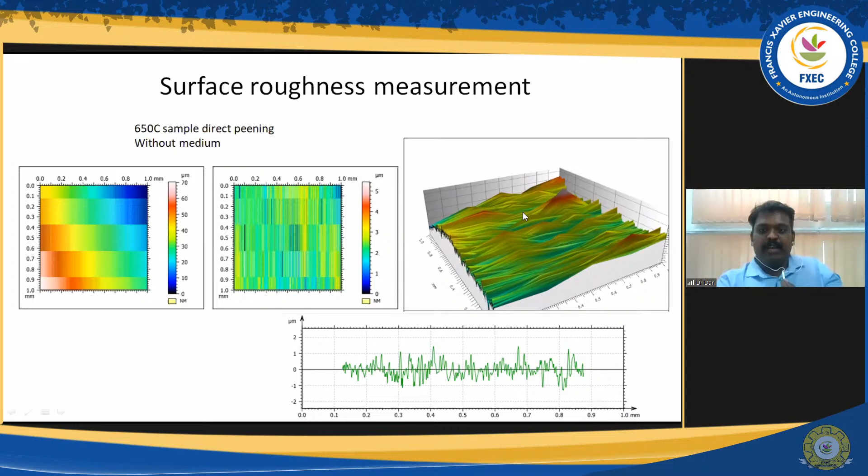Next, what characterization did I do? I tried to show here surface roughness for each condition, because after the processing, surface roughness is always very important. So I tried to see the surface roughness. By using the water medium, it has very low surface roughness, 0.047 - it's not at all affected the surface. That's why I chose the water medium. Without water medium, you can see how the surface is affected in the right side diagram. The 3D profile shows how rough the sample is.

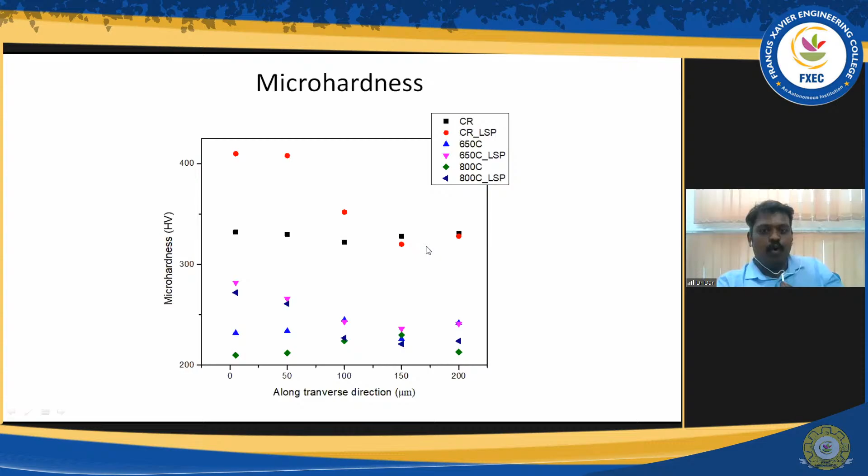So for micro hardness, after the LSP process, you can see there is an increment in hardness near the surface, but if you go inside the material, there is no significant enhancement.

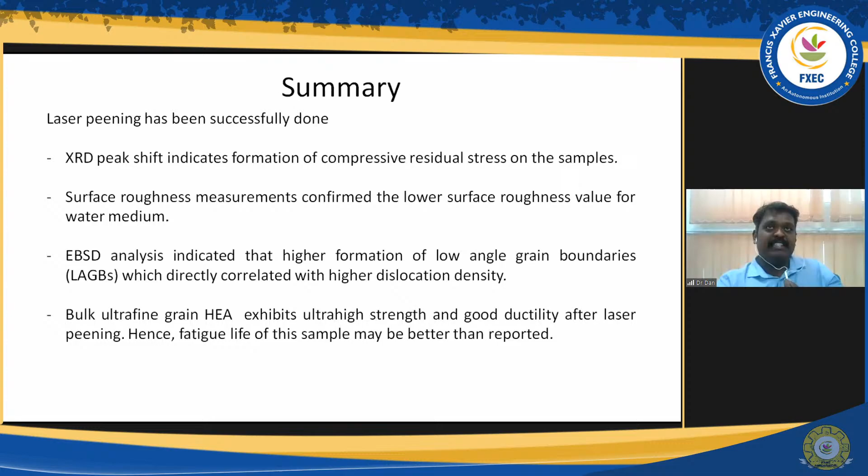Based on this study, from the XRD graph you can understand the compressive residual stress and also how to measure the surface roughness. From the EBSD analysis, you can say that the formation of low angle boundaries directly correlates with the higher dislocation density in the material. So finally, the ultra-fine grain size in this HEA is giving very good properties. That's what I want to conclude today.

So overall summary: as a student, you can understand what severe plastic deformation is and how grain refinement happens in some of these processes, which in turn leads to improvement in the physical and structural properties of the material. For researchers, or new faculties who want to do PhD in this area, they may get an idea of what kind of research is going on in SPD, and also how to present data and interpretation, which I showed a little through the case study. Finally, the microstructure-processing-performance of the material may be appreciated.

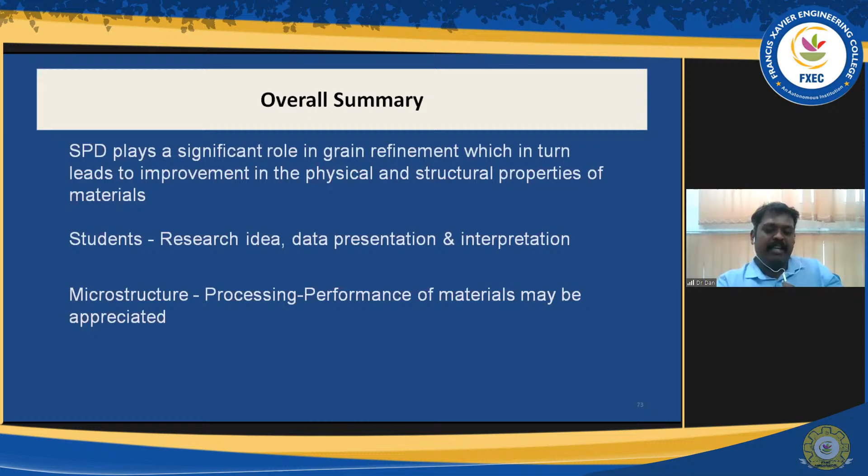So for the students, you can aim for your PhD with these professors - they are all very pioneering in this field. This nano SPD conference may be postponed to next year because of the COVID issue.

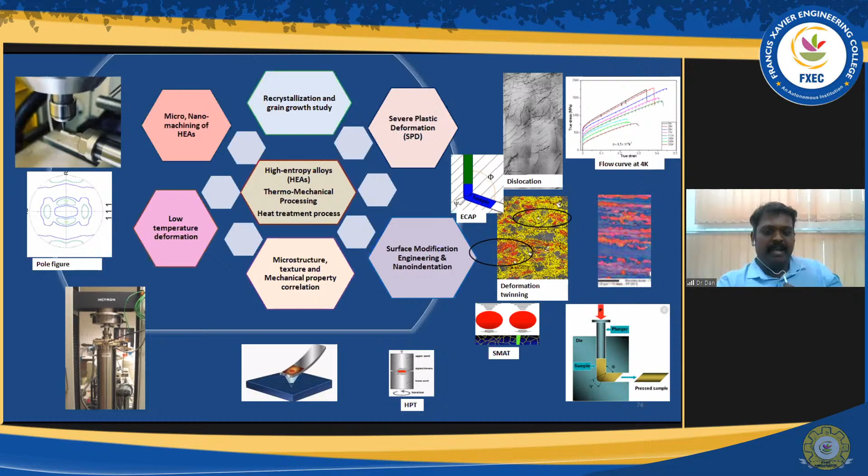For that, I want to thank the AVH Foundation. So finally, just a little advertisement for me - I showed all my research areas, what I want to do here in IIT Indore, like surface modification techniques. I would also like to do micro nano machining of high entropy alloys in the coming years. Those interested in PhD may apply next semester.